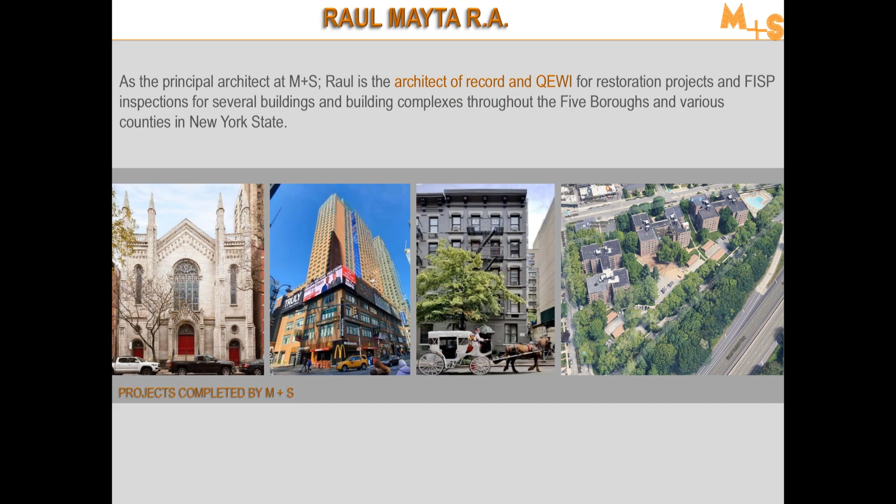Building facades, as you know, are in permanent contact with the public and the exterior environment. As one of the most important instruments of presentation to the exterior world, facades, in our opinion, should articulate a respectful relationship with neighboring buildings, a desired aesthetic, but also, and above all, it should express and guarantee its safety. Safety is the key and the magic word for us when we're handling facades.

As we will learn today, FISP is really a result of several fatal accidents. We wanted to show you two accidents that, in our opinion, could have been avoided. The first one occurred back in August of 2013 and involved the resident of an 11th floor apartment at 57th Street. The resident of the apartment was casually smoking a cigarette and decided to sit down on the top rail of her balcony. Unfortunately, the balcony could not take the load and collapsed into the street.

The second accident involved a 60-year-old architect, a pedestrian, not a building resident, who was walking near Times Square. The accident occurred back in 2019 and was caused by the dislodgement of a terracotta section from one of the lower floors of the building.

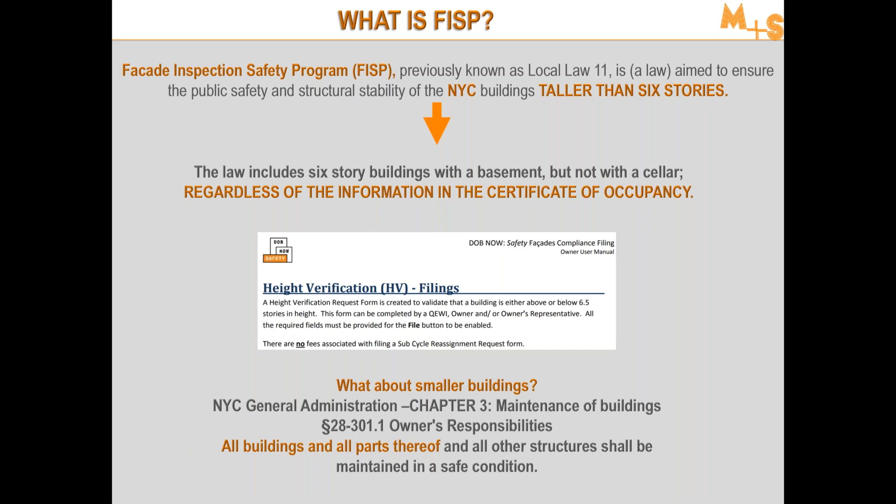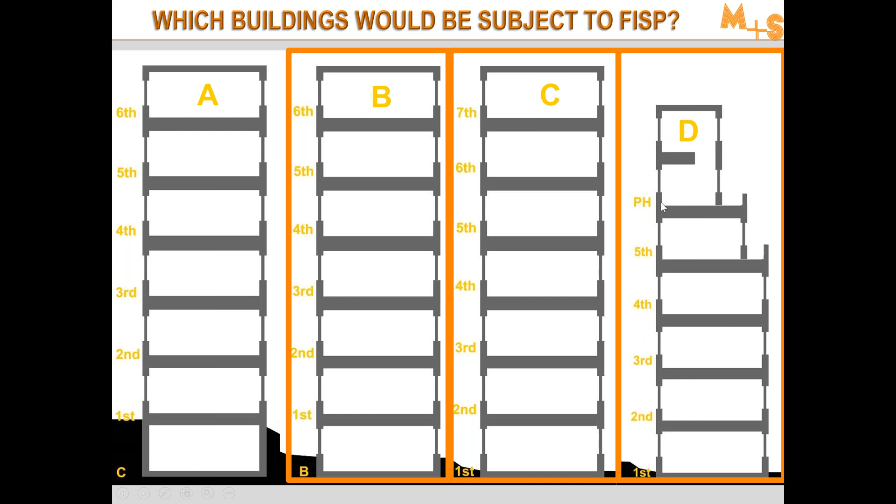FISP was established as a consequence of an accident that occurred on May 16, 1979, where a woman attending Barnard College was fatally struck by a piece of terracotta that fell from the 11th story of the building at 601 West 115th Street. As a consequence, Mayor Ed Koch signed Local Law 10, the first law that required buildings greater than 6 stories in the 5 boroughs to file a report every 5 years.

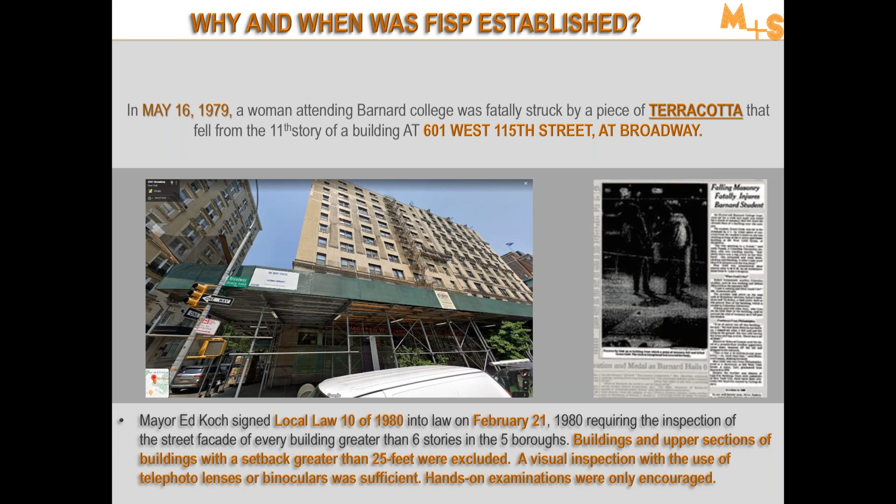This initial rule had few exemptions. For example, buildings and upper sections of buildings with a setback greater than 25 feet were excluded. Also, only visual inspections with the use of lenses or binoculars were sufficient. Hands-on examinations were only encouraged but were not required.

Through time, FISP became more strict. In 1997, a series of collapses led to the change and deletion of the initial Local Law 10. In 1998, Mayor Rudolph Giuliani passed a new Local Law 11 into law. This new law removed all the exemptions of the previous Local Law 10 and finally required hands-on examination.

In 2010, the program, in its 7th cycle, was renamed FISP, which is how we know it now. During this change, staggered filings were introduced. We'll go over the staggered filings later, but the goal was to avoid over 14,000 building reports being filed at the same time.

In May 2013, a renewed focus was passed, implemented on balcony and railing inspections. This change was issued due to the accident we reviewed earlier. In 2016, all FISP reports were required to be filed electronically using the DOB NOW system. Additionally, a QEWI certification was added for professionals filing FISP reports.

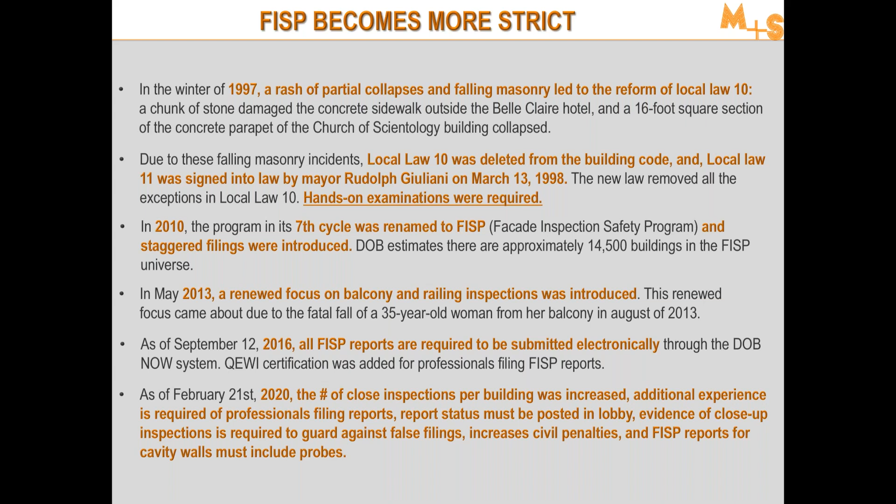So when do you need to file your FISP report? Owners of buildings subject to FISP must file and have their buildings inspected every 5 years. The inspection deadline is based on the building's block number. We're currently working on the 9th cycle, having completed 8 cycles since 1980. Each cycle is divided or staggered into 3 subcycles, A, B, and C. So once you know your block number, pay attention to its last digit. Since we are in April of 2020, if your building's last digit is 5, you should be subject to subcycle A. Therefore, you should be filing before February 21st of 2022.

We strongly encourage building owners not to wait until the last month before filing or doing the inspection for the reports. This is for 2 reasons. First, you want to avoid late fees, because the review of the reports may take 1 or 2 months, and you want to have the approved report before the deadline. Also, inspectors may find issues with your building that you may want to address before filing the report.

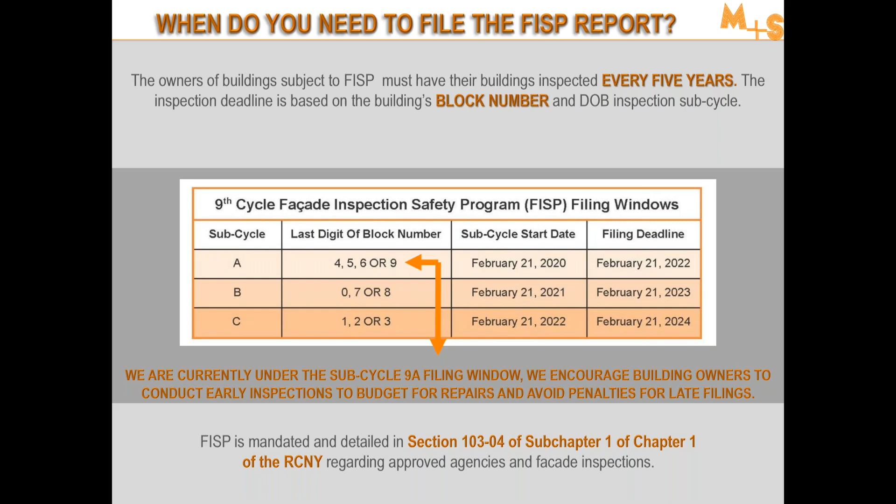All the information included in this presentation is mandated and detailed further in section 103-04 of subchapter 1 of chapter 1 of the Rules of the City of New York. So who can file a FISP report?

Since 2016, FISP reports can only be filed by QEWIs. QEWI stands for Qualified Exterior Wall Inspector, an architect or professional engineer with at least 7 years of experience handling facades. This experience is verified through a DOB interview and a testing process by the DOB Commissioner. Please note that not all architects or engineers are QEs.

So why is it important to select the right QE? In our opinion, you should select your QE as you select your personal doctor. Your QE should demonstrate relevant experience with the facade system of construction type specific to your building. This means that if your building is made out of brick and terracotta, the QE should show you projects completed on those systems. If you have a modern building that is all window wall systems, the QE should have completed projects with those systems too.

And also, you should make sure that your QE is very involved during the inspection process.

Talking about involvement, I wanted to show you an unfortunate accident that occurred back in 2015. A professional engineer classified a building on the Upper West Side as safe. However, 6 months after the approval of the report, a terracotta window sill collapsed and killed a 2-year-old girl. The DOB investigation determined that the engineer did not even visit the site.

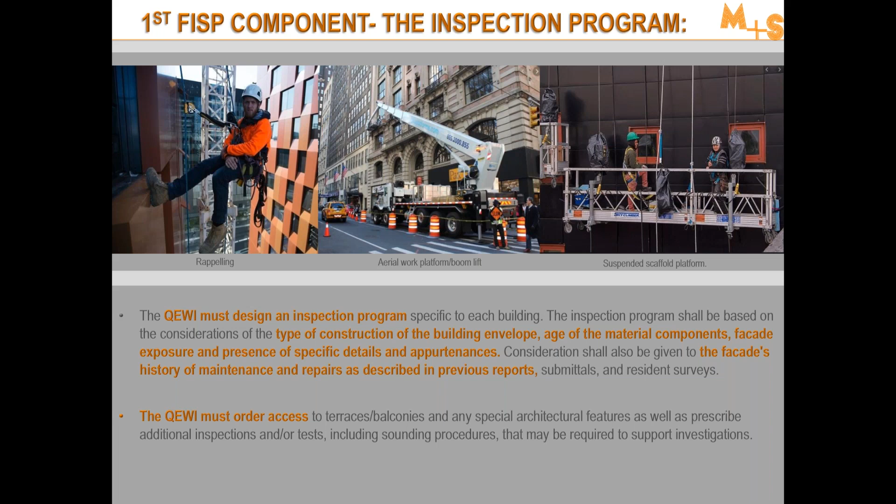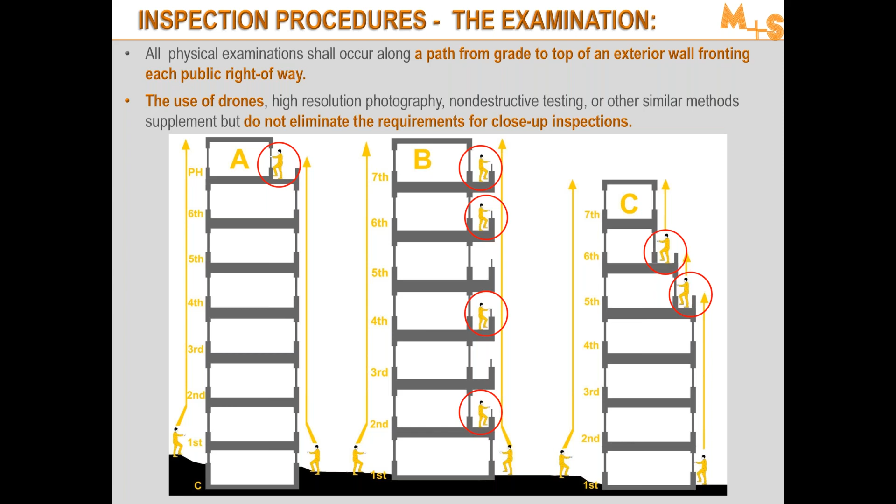The number of examinations per facade has also changed this year. DOB now requires a minimum of 1 examination every 60 linear feet of facade. So if your facade is 70 feet wide, like the image shown on the screen, you will need 1 examination for the first 60 feet, and an additional examination for the last 10 remaining feet.

We included a table that you can use to determine the number of examinations. So if your building, for example, is 150 feet wide, you will need up to 3 examinations.

So for irregular facades, this includes facades that have setbacks or facades whose heights may vary throughout the property line, you have to apply a few different formulas. If your building has setbacks, you should add the length of the facade that is facing the street and also the length of the sections that are perpendicular to the street. You add up these sections and then divide by 60 to determine the number of examinations.

If your building has irregular heights, you should only be measuring the sections that are higher than 6 stories. Add up those sections and then divide by 60 in order to determine your number of examinations.

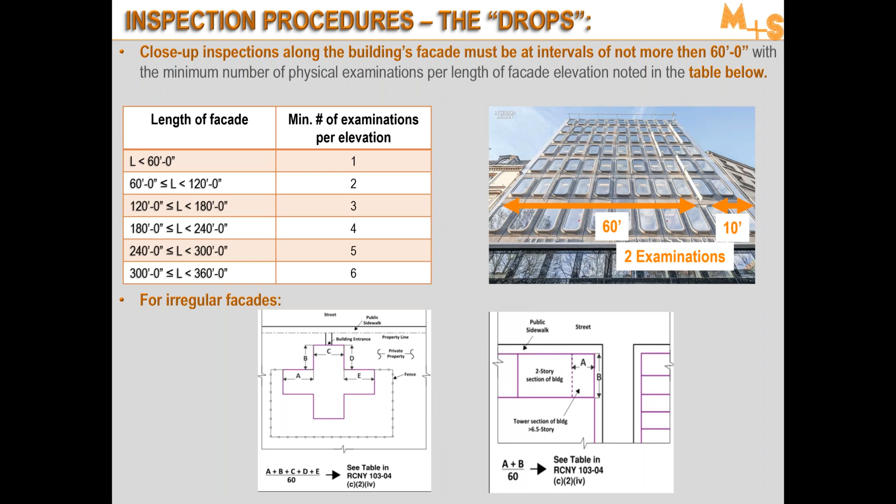Another new component of the report will be probes. Probes should only have to be performed if your building has cavity walls. So the number of cavity wall probes has to be determined by your QE, but please note that you will need at least 1 probe every 60 feet.

The goal with the probes is to determine the spacing and the conditions of the cavity walls. This requirement was due to recent failures on cavity walls that were caused by missing or deficient wall ties. Thankfully, most of the probes are considered minor work, unless your QE decides that he wants very large probes, at which point you may need to pull out some work permits.

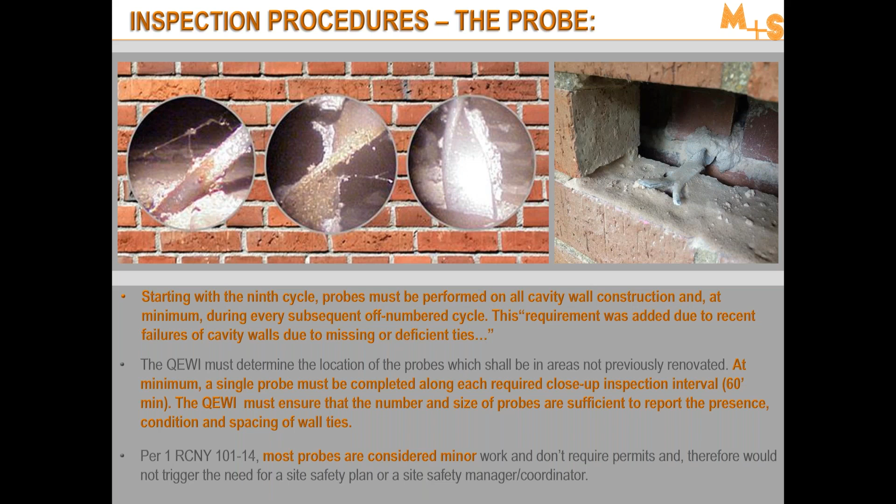So during the field work, and at the end of the field work, your QE should give you a call and let you know that your building will be classified unsafe, safe, or SWARMP. We will explain those classifications now. Unsafe is a condition of a building that is hazardous to the public and requires prompt repairs.

In addition, it's any condition that was previously reported SWARMP and was not repaired according to the timeline provided by the QE. We wanted to show you some examples of unsafe conditions. As you can see, the stucco on the left, the terracotta in the middle, and the brick on the right-hand side are in very bad shape, to the point that we could remove them manually. These photos were taken during my inspection on a building located in Chinatown.

Unsafe conditions must be corrected within 90 days from the date of DOB notification. Of course, 90 days is unrealistic most of the time. Therefore, DOB allows extensions. The first extension is typically approved for 90 additional days, and DOB will have no problem approving them as long as you prove that you have provided proper protection.

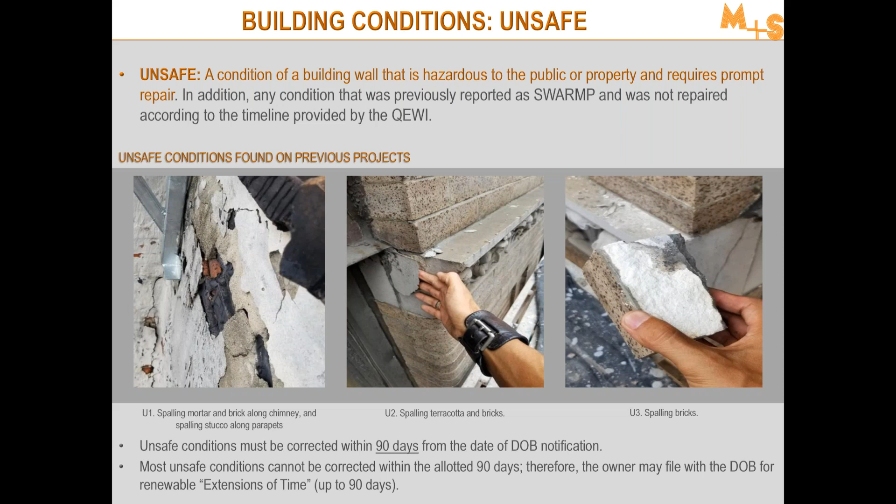So sometimes you will need to report the unsafe conditions, and they are typically reported by calling 311, 911, or filing a FISP 3 form. The filing of the extensions is conducted by the FISP 1 and the FISP 2 forms.

I wanted to show you additional unsafe conditions found on other projects. We see a piece of terracotta that is dislodging at the landing of the fire escape. Also sections of stone and bricks along the window headers that are about to collapse. Finally, stucco sections that have shifted — I know it may look like brick, but it was actually stucco — and unsound sections of brownstone patches that were about to collapse.

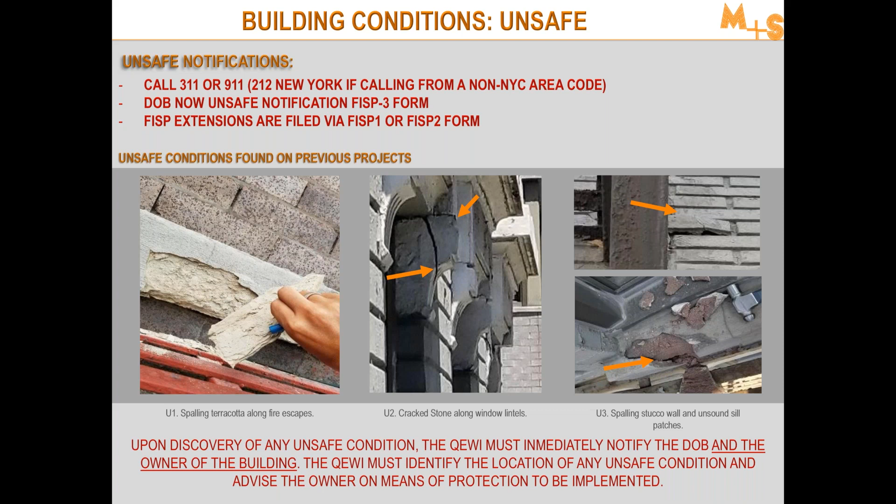Sidewalk sheds are the most common method to provide protection in unsafe buildings, and they must remain in place until permits are signed off and the FISP report has been approved by DOB.

Under certain circumstances, the QE could file a letter and request the partial removal of the shed. However, you run the risk that DOB may object to the report, and then the owner will have to pay to have the sidewalk shed reinstalled.

Additional images show more unsafe conditions. We see a large stone crack, previously repaired with caulking, that is about to collapse. Some balcony ceiling sections on a building located in Queens, Chinatown, were also about to collapse. And one of the most scary conditions I've seen lately was a facade bulging on a 3-story building located in Brooklyn. This was caused by structural movement of the foundation walls.

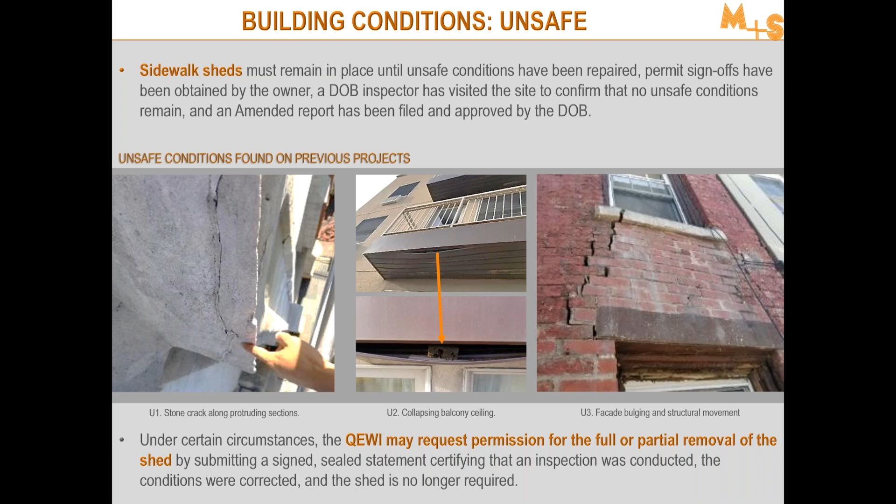The second type of classification you may find during inspections is called SWARMP, or safe with a repair and maintenance program. This condition means the wall or parts of the wall were found safe at the time of inspection, but require repairs or maintenance within a time frame established by the QE. If you don't conduct these repairs, the conditions will get worse and develop into unsafe conditions.

We see three examples. The ones on the left and right include lack of caulking. If you don't put proper caulking on the windows, you will first cause moisture infiltration and then deterioration of the adjacent masonry due to freeze-thaw cycles. If you don't put caulking around the railing posts, the underlying structure or railing anchors may deteriorate, and the railing posts will start to move within a few years.

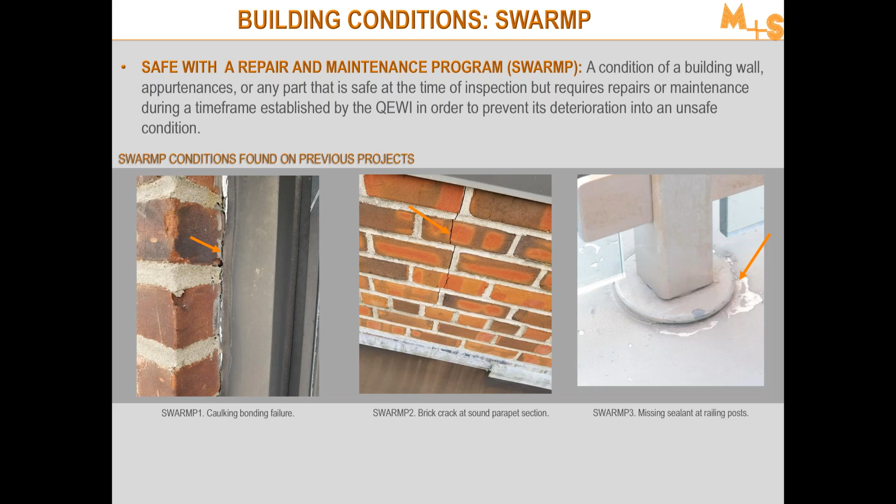The image in the middle shows a hairline crack developing on the roof side of a parapet wall. During my review, I sounded the adjacent areas and determined that the brick and mortar were sound. Therefore, it should be repaired, but it was not an emergency. Also, the crack was only shown on the interior side of the parapet, not on the exterior side facing the street.

As noted, the owner is responsible for ensuring that SWARMP conditions are corrected and reported to the DOB within the timeframe recommended by the QE.

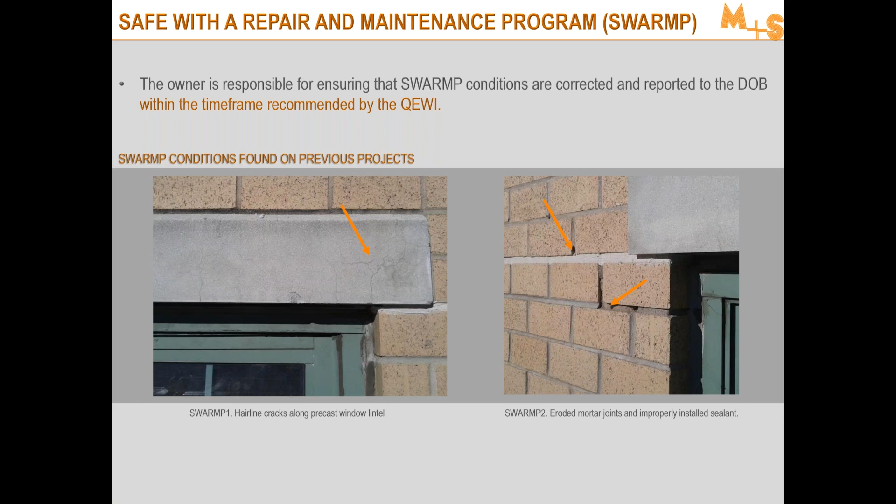The last type of classification your QE may give your building is safe. Safe is a condition of a building that does not need repair or maintenance to sustain its structural integrity. Therefore, your building is fine and good to go for about 5 years until the next cycle.

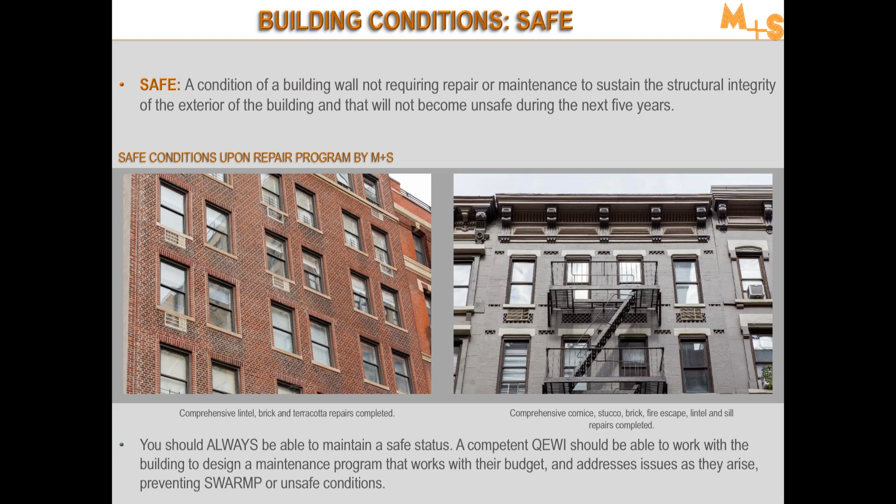So let's assume that your field work has been done and your QE knows what status your building will have. Then he will go to his office and start typing the report. The report will have a large amount of general information such as address, block number, BIN number, landmark status, location of nearest streets,

also some information about the owner, such as name, mailing address, telephone, description of the building, meaning height, plan dimensions, use, type of construction, and some of the most important information includes description and photographs of any distress, the procedures for making critical examinations, and also classification, quantification, and location of

any safe with a repair and maintenance program, any SWARMP item, or unsafe elements. The report should also include information regarding active water leaks. Water leaks most likely trigger a SWARMP condition. Finally, it should include recommendations for repairs and deadlines to repair SWARMP items.

The report can only be filed after the QE and the owner have signed it. So there is a need for certification by the owner indicating that he or she has reviewed the report. The owner will need an e-filing account in order to process his signature.

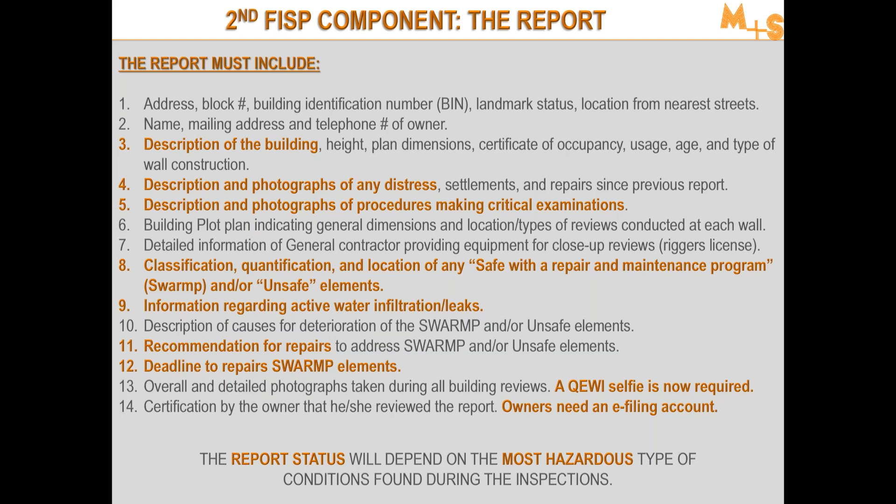The report status will depend on the most hazardous type of condition found during the inspection. This means that if your building is mostly safe but has one or two SWARMP conditions, your building will be classified SWARMP. If your building is mostly SWARMP but has one unsafe condition, unfortunately your building will be deemed unsafe.

So there are three types of reports that may be used by the QE depending on the timing of your filing. The first report filed by the QE at each cycle is called the initial report. The subsequent report is used by the QE to change the initial status of the building. This is typically filed to achieve safe status once SWARMP items are repaired, or to downgrade SWARMP items of buildings that have degraded over time.

Finally, an amended report is used by the QE to certify that unsafe conditions have properly been addressed. The related DOB filing fees are also shown on the screen, and they're typically paid by the owner.

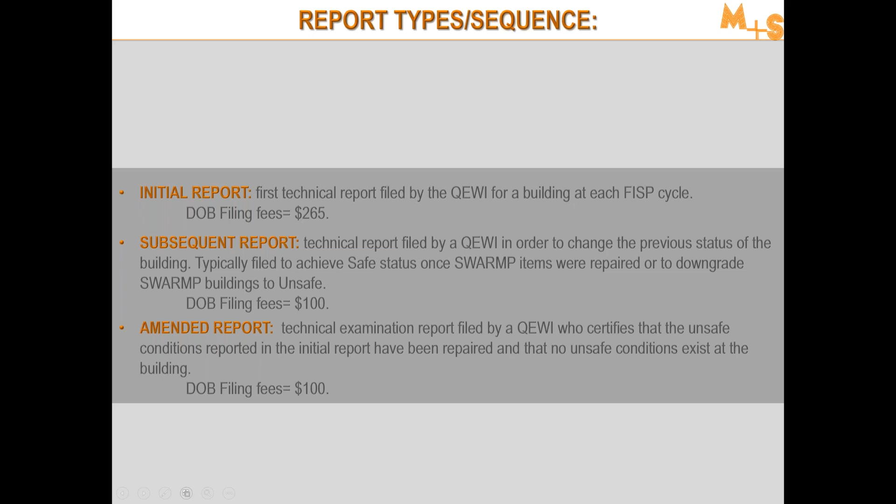So how much does a FISP inspection cost? Again, please look at this screen and understand that the costs are limited to the inspection, not to the repairs yet. Owners should consider two main elements of cost. First, the professional services, which are the fees that will be charged by the QE and are limited to studying your building's history, conducting the building inspections, and preparing the FISP report.

If a repair program is required, these fees are typically additional and may range between 6 to 12% of the final construction cost.

So professional fees limited to the inspection will range in price, and it will depend on the size of the building, facade details, number of balconies or setbacks or terraces that need to be reviewed. Of course, if your building is very large and complicated to access, the inspector will spend more time.

It will also depend on the records available from the owner or management. If the owner or management doesn't have copies of the previous report or isn't aware of any issues in the building, then the QE will need to pull copies of records from the DOB and, probably—this is something our firm always does—conduct surveys among the residents in order to see if there were any failures or water infiltration issues that were not reported.

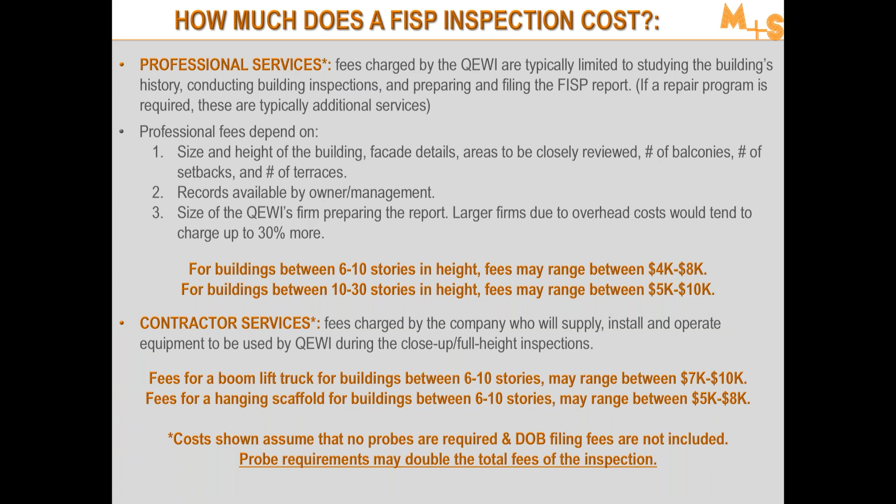Now, to complete this presentation, we will show you 4 elements of concern. If your building has any of these elements, please don't freak out, don't be scared. This just means that you need to monitor the elements and have a closer look at every FISP cycle.

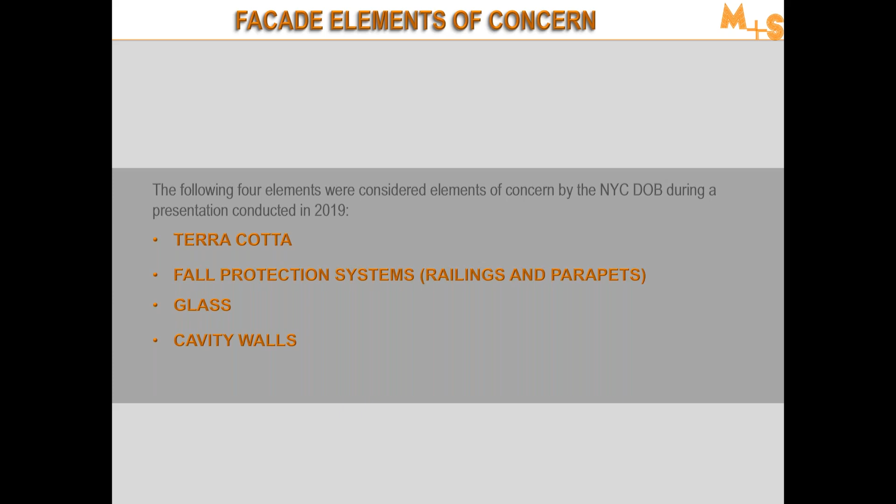The first element of concern is terracotta. Terracotta is Latin for cooked earth and is a mix of clay and sand molded to complex shapes, glazed, and then fired at very high temperatures. We have an example of terracotta ornaments on the screen. As you can see, you can achieve very complicated shapes and it looks beautiful.

Terracotta was selected during the 19th century mainly due to its aesthetics and relative fast production, not due to its longevity or strength. Once it loses its glaze, it becomes very porous and is subject to freeze-thaw cycles.

As we can see in the sections, terracotta is usually composed of smaller segments, so you will have joints that may cause moisture infiltration into the backup structure or backup masonry. Also, as you can see in the section, terracotta is not solid - it is hollow, pretty much hollow clay masks.

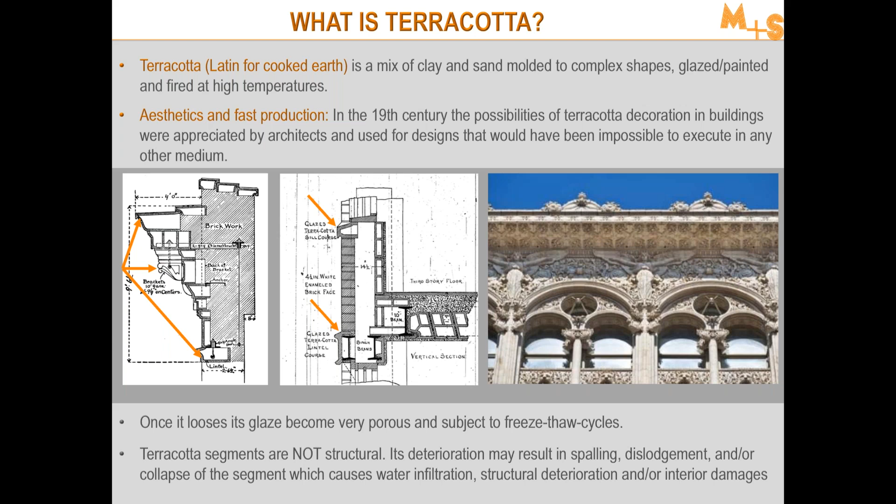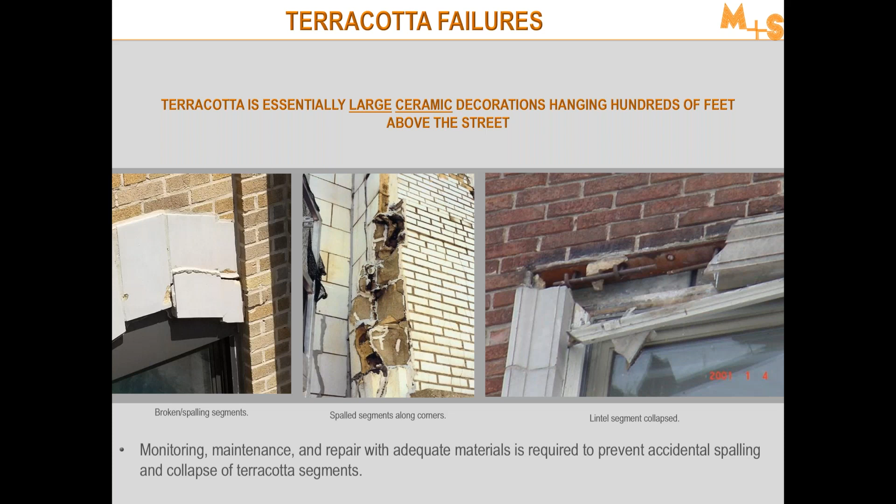Monitoring, maintenance, and repair with adequate materials is required to prevent accidental spalling and collapse of terracotta segments. Terracotta has been involved since the beginning of FISP history, essentially because these are large and thick ceramic decorations hanging hundreds of feet above the street - again, selected for aesthetics, not longevity.

An additional element of concern when dealing with facades is fall protection systems. The DOB rules mandate that the QE inspects balcony railings, guards, or fences to ensure their components are positively secure against upward movement. The QE must verify that all welds and screws are in safe condition so the railing is not deflecting or moving.

As we can see in the images, there's a railing post that has significantly deteriorated, which will probably require installation of a new plate on the bottom to secure it properly. Then we have a missing fence panel on the roof, temporarily patched with a chain link fence. Unfortunately, the temporary work had been there for 6 years, so the building had to be deemed unsafe.

Last, we see a parapet wall with a top-mounted railing that is under review for height. Typically, the height for parapets and railings has to be 42 inches from the adjacent walking surface. This height must be in respect to the code in effect at the time they were installed or substantially altered.

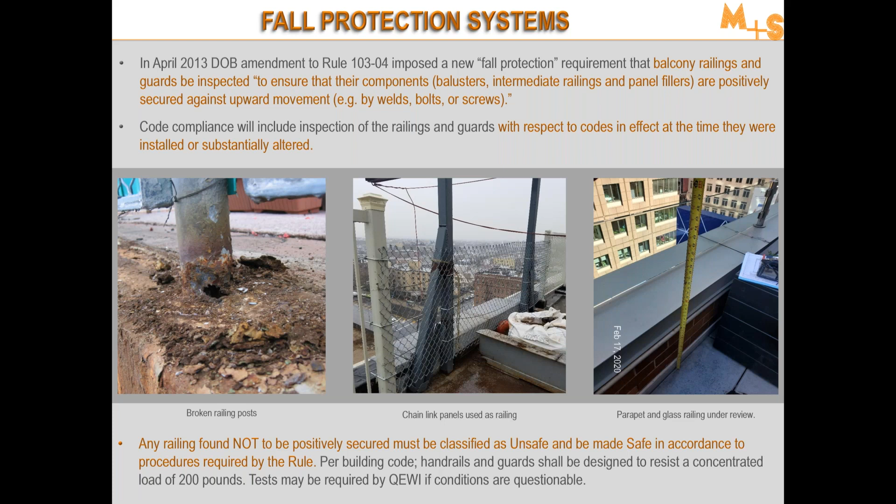Next element of concern is glass. Glazing can be found on windows, doors, railing panels, and if present in walls, will be in the shape of window walls or curtain wall systems.

Glass damage can be caused by improper design of the support system, defective fabrication, defective installation, or impact while being maintained, as in the image on the left. The image in the middle shows a shifted section due to failure of its supporting system, and the image on the right shows a missing panel that has already been dislodged due to failure of the hardware.

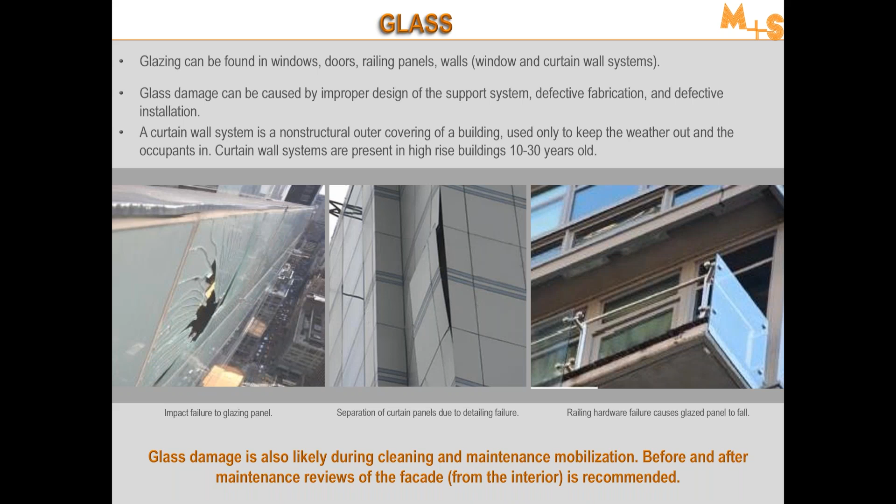Due to its nature, we strongly recommend that owners review the glazing components before and after any maintenance, because damage can be caused during the mobilization of the maintenance equipment.

The last element of concern are cavity walls. Cavity walls are a type of wall that consists of two layers, separated by a hollow space or cavity. The layers are connected by metal wall ties. Cavities can function as a drainage plane, allowing any water that has penetrated the veneer to drain to the bottom, where it encounters flashing and is directed to the outside through weepholes.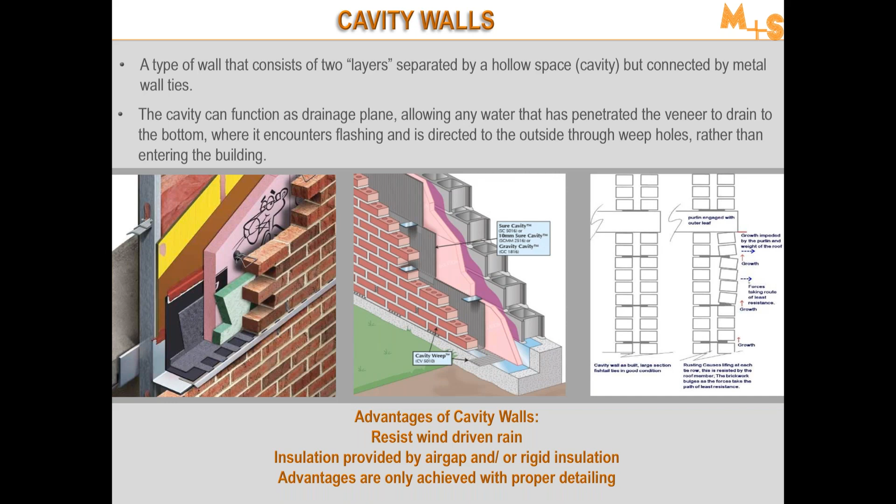These specifications should be confirmed by the QEWI using the original construction plans for the building.

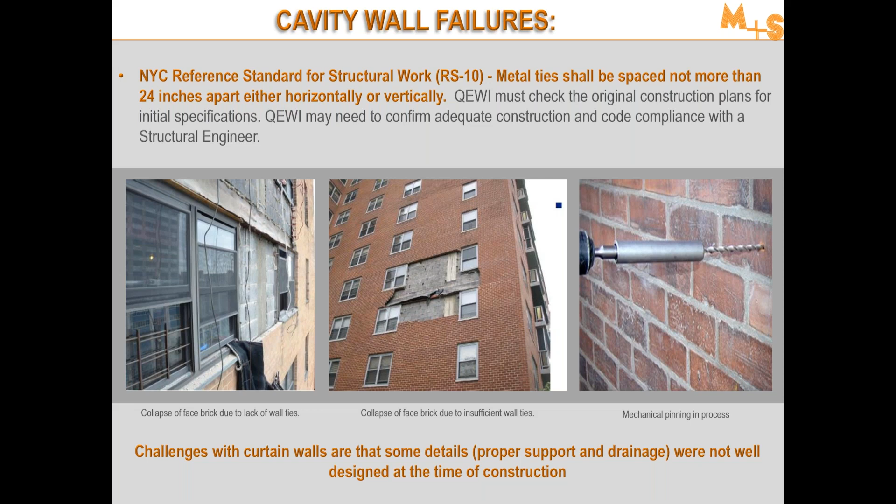So when do you need to file your first FISP report? This is typically asked for newer buildings. You need to file your first FISP report 5 years from the date of your first certificate of occupancy, only if that date falls within your filing window.

And then we know this is based on your block number. If that date falls outside of your filing window, then you just need to wait for the next FISP cycle and then file it on your applicable filing window.

So please don't wait for your first FISP cycle to do a comprehensive review of your building. If you have a new building, we strongly recommend owners conduct the first review before the statute of limitation expires. Please don't wait until the first FISP cycle, because this may come 10 years or sometimes many years after your first certificate of occupancy.

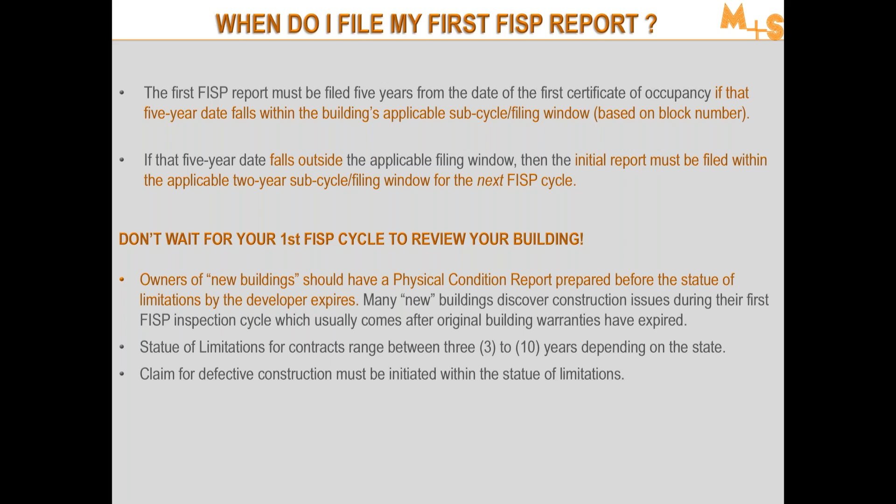The statute of limitation for contracts ranges between 3 to 10 years, typically 5 years in New York. This limits the claims for defective construction. So if your QEWI finds defective roofs or defective facade systems, you could not initiate any claims if the defects are discovered after your statute of limitations has expired.